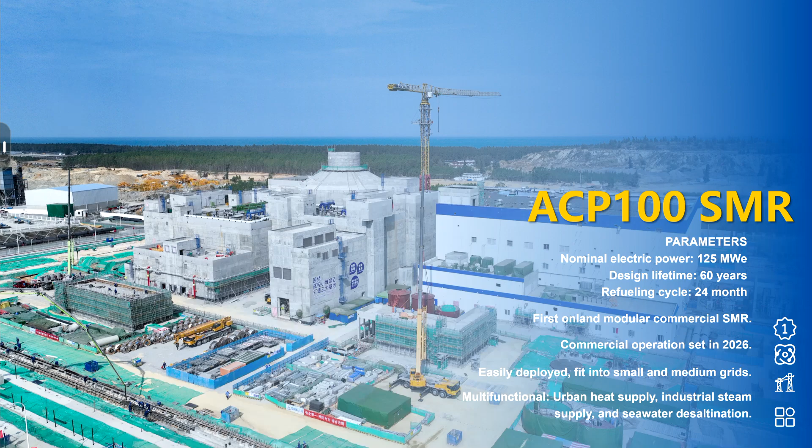And another CNNC small modular reactor is the ACP100. We began to build its demonstration project in 2021, and the plan is to get into operation next year. By the way, we just finished the cold functional test last month.

The ACP100 is one of the most advanced in terms of construction period progress. It is small, it has an integrated design, and it is flexible for small or medium-sized power grids. You can use it for electricity supply, steam supply, seawater desalination, and all kinds of multiple applications.

We all know that during the last decades, a lot of Generation 3 nuclear power plants have faced delays and budget overruns. I think the delay can reach up to an average of 8 years, and the budget can rise up to more than double. But all of CNNC's Generation 3 nuclear power plants have been finished ahead of schedule and within budget. The reason is efficient construction management.

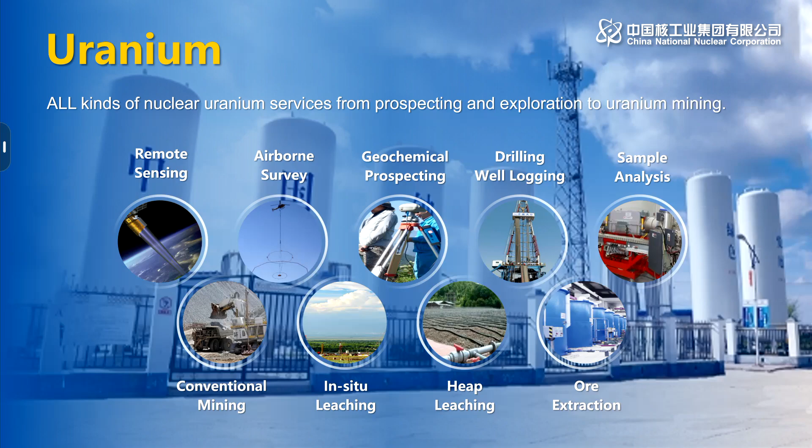And talking about fuel supply: CNNC is China's only full-cycle nuclear fuel supplier. From exploration to uranium mining, we have the professional teams and advanced technology to secure our fuel supply.

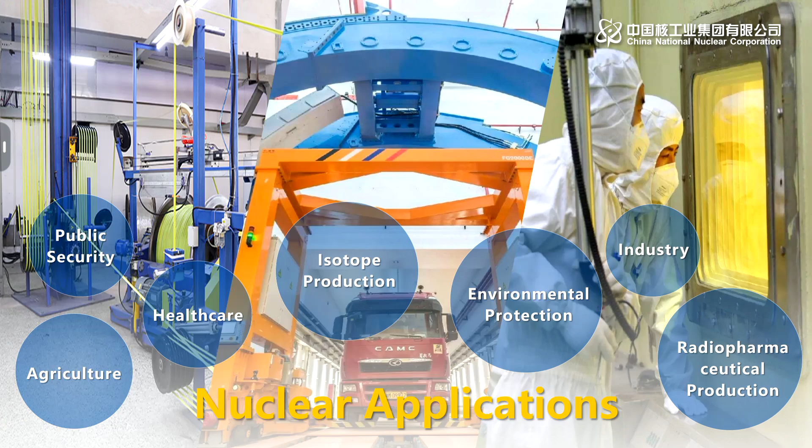CNNC is also one of the biggest nuclear application companies in China. We account for more than 80% of the research, development, and production capabilities in China, and we offer more than 17% of the nuclear medicine in the Chinese market.

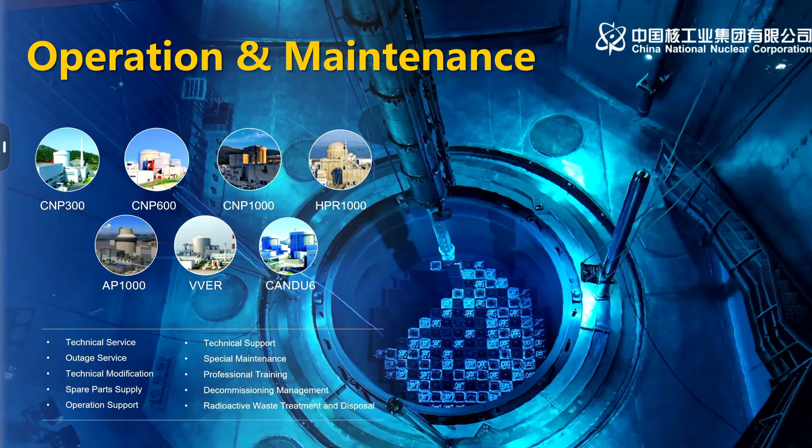When it comes to environmental protection, CNNC offers services in the radioactive waste management business. We can do radioactive waste reception, treatment, disposal, and also decontamination, dismantling, and decommissioning of nuclear facilities.

So to our global clients, CNNC offers specialized service across all nuclear sectors. That commitment also extends to talent development. We offer specialized training programs, professional education, and partnerships with top universities with scholarships. We welcome all collaboration around the world to advance nuclear together.

All right, ladies and gentlemen, that is a brief introduction about CNNC. The story continues as my colleague will dive deeper into our research and development capability, proven delivery, and diversified application. Okay, Mr. Li, you have the floor.

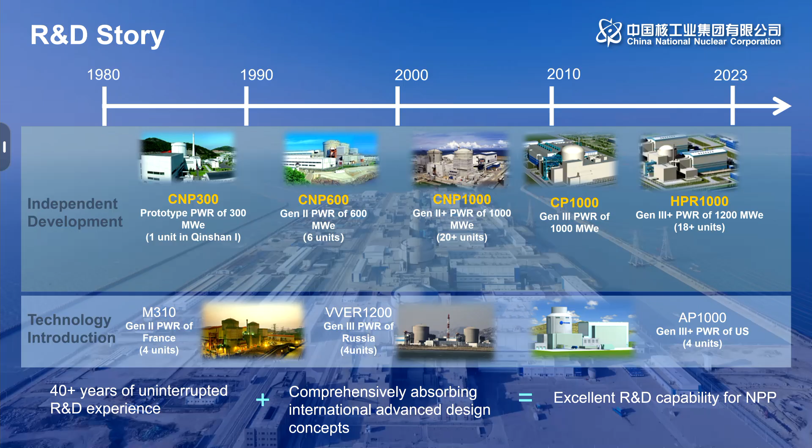CNNC has more than 40 years of uninterrupted R&D experience. From the very beginning, the Qinshan Phase 1, a 300 megawatt electricity nuclear power plant, was built in 1985, 40 years ago. Then we built our own 600 megawatt plant called CNP600. After performing self-reliant R&D, finally we have our own third generation large-scale nuclear power plant called HPR1000, also known as Hualong One, and also ACP100, the SMR.

The third one is called CIAE. This one is mainly focused on the sodium-cooled fast reactor design, and also the fuel for the fast reactors.

The fourth one is a very interesting one, we call it CMPO. This one is mainly for R&D and research on operation and maintenance, such as inspections, repair and maintenance technologies.

Not only do we utilize our own subsidiaries to perform R&D, but please notice that every year we have about 8 or 10 units put into construction, so we will utilize all of the industrial chain in terms of R&D and design.

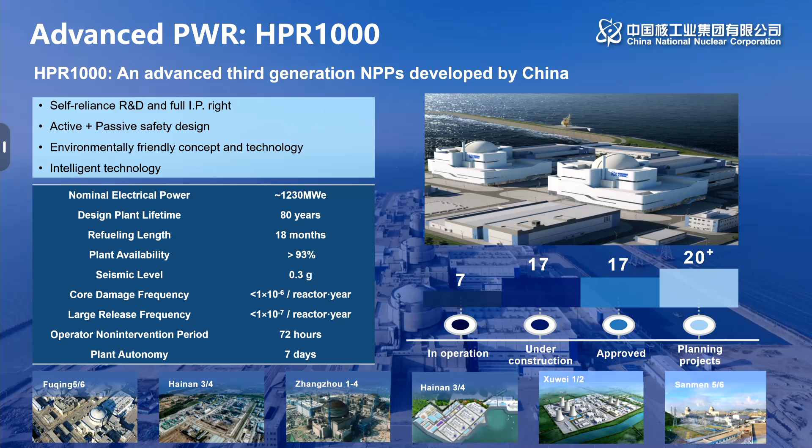Now we have 7 HPR1000 in operation, both in China and in Pakistan. There are another 17 under real construction, and another 17 have been approved by the State Council of China, meaning those approved units will be put into construction in the next 18 months, according to government requirements. Then another 20 more units are planned for construction in China and other countries.

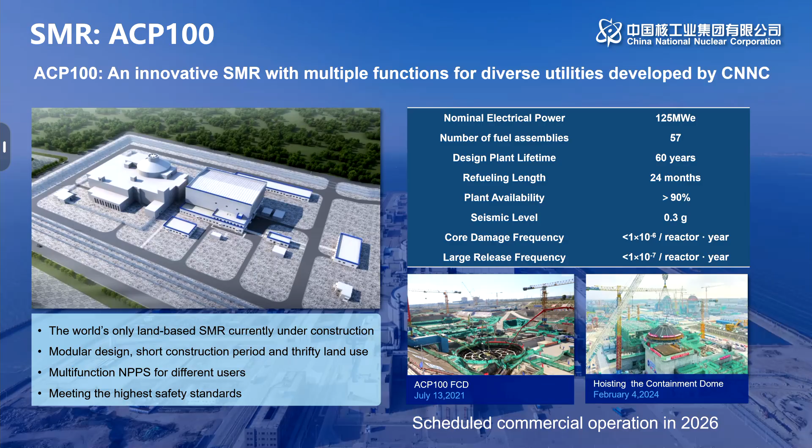The second one is the ACP 100, the SMR. The nominal electrical power will be 125 megawatt, the plant lifetime will be 60 years, and we have a long refueling cycle of 24 months. This ensures very high plant availability, larger than 90%. It can reach the safety target for third generation nuclear power plants, or we can say it reaches one order of magnitude better than the regulatory target defined by IAEA.

This is the progress of the project. The first one was constructed in 2021, and last month we finished the cold functional tests. We anticipate this first one will be put into operation in early 2026.

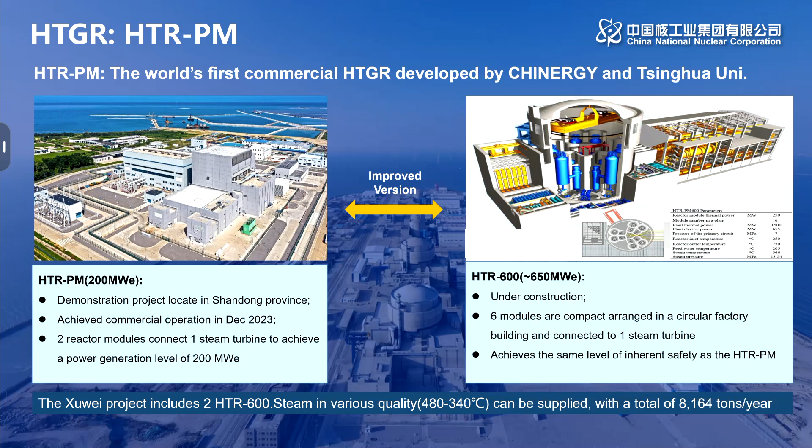So in CNNC, we have totally experienced human resources with more than 70 disciplines in 11 mature fields. The total number of engineers or specialists is more than 10,000. You can see we have a strong capability covering different disciplines from reactor design, equipment design, electrical communication, balance of plant, and conventional island design.

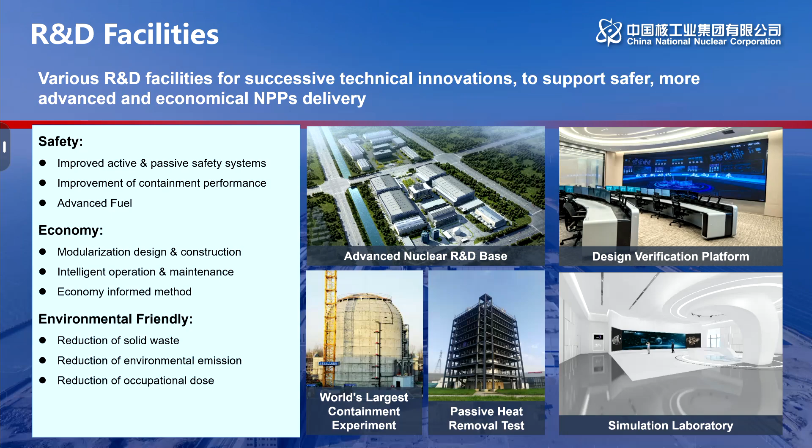We have also constructed several large R&D bases to proceed with the R&D program. This base is located in Langfang, in the southeast of Beijing, just 70 kilometers away. In Langfang we have several large platforms to verify phenomena of new reactor types, such as the world's largest containment experiment for structural bearing capacity after a severe accident.

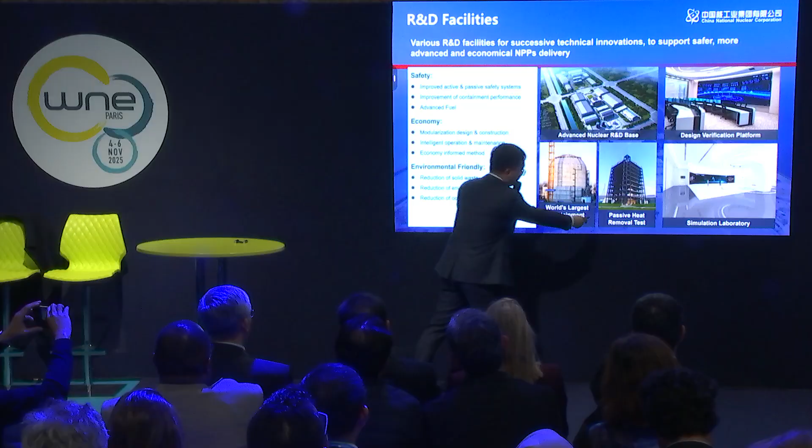And this one is also a structural containment test platform called the passive heat removal test. This one is the thermohydraulic heat removal system verification platform.

Now we can not only hand over a real physical plant, but in the next few years, we can hand over a totally digital plant. Our goal is to use digital technology in the design process and construction process, and finally hand over a digital plant to the owner for long-term operation and maintenance.

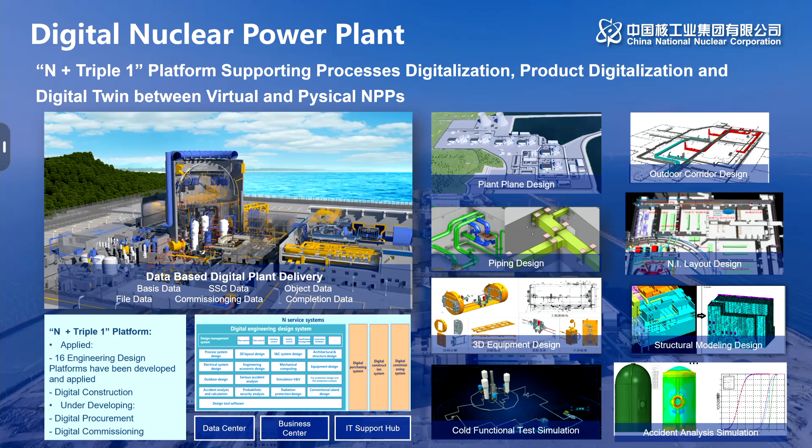In the design part, we have developed different discipline digital platforms, such as plant plan design, piping design, layout design, equipment design, and also safety analysis and accident analysis simulation platforms. In the near future, two-dimensional documentation and drawings will be reduced as much as possible, and three-dimensional delivery, not only to the construction team but also to the owner, can be fulfilled.

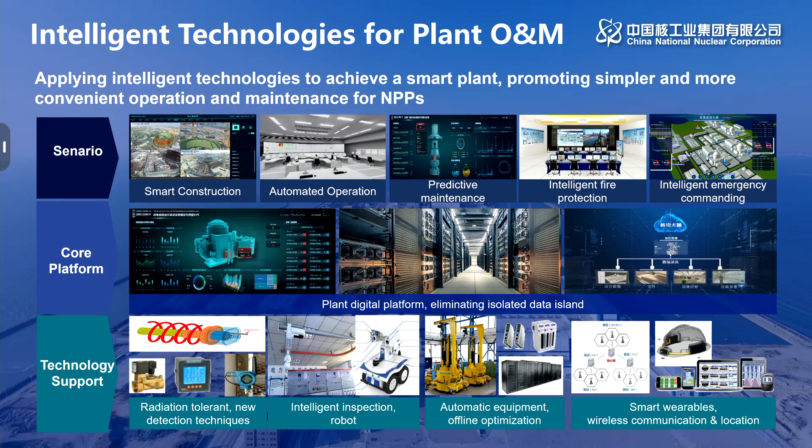AI is a very hot topic. Now we are using more and more AI technology, automation operation technology, radiation tolerant devices, automatic equipment, robots, wireless technologies, and smart wearables to make the plant more smart and more intelligent.

The total target is to achieve smart construction, automated operation, predictive maintenance of equipment such as rotating equipment and the cooling water pump of the plant, and intelligent emergency commanding under accident conditions. In the near future, the operator workload and field workload can be significantly reduced by applying these intelligent technologies.

As mentioned by Mr. Liu, this is a very interesting project called the Jiangsu Xuwei project. In this project, there are 4 HPR1000 PWRs combined with 2 HTR600 high temperature gas-cooled reactors.

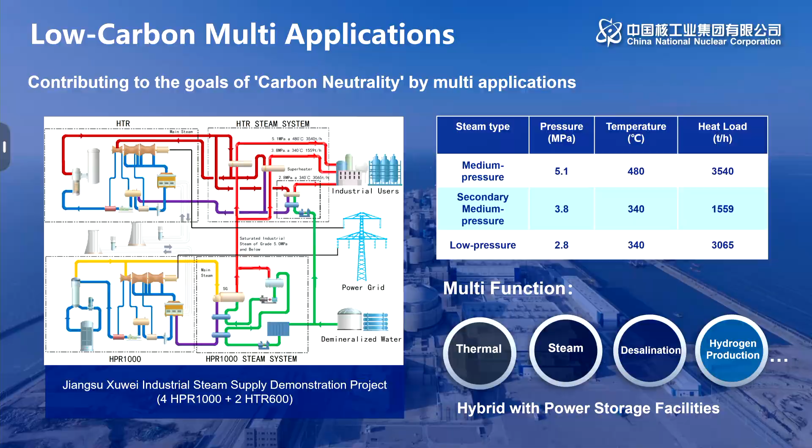The HPR1000 will heat up the cooling water to saturated steam, and then the HTR, using its high temperature features, can overheat the saturated steam into overheated steam. Then we can supply different levels of steam to customers nearby. There is a large petrochemical park near this project, so we can sell different pressure and temperature steam quality to customers. This really happens in the Jiangsu Xuwei project.

Because CNNC has a very integrated industrial chain covering design, construction, operation, maintenance, and commissioning, in the design phase we can fulfill the needs of construction teams and manufacturers. For example, we use more and more modular design in our design phase to achieve modular construction.

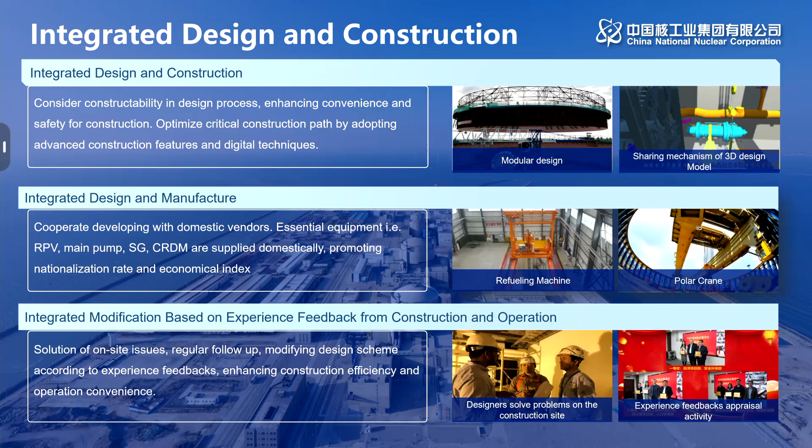In the design phase, we also try to reduce difficulties for equipment manufacturers, such as lowering the placement of some key equipment to lower the seismic spectrum. That means the seismic qualification of the equipment can be significantly reduced. That's why we call it combined design and construction, and combined design and manufacture.

Also, through massive construction of HPR1000, we optimize our design step by step based on experience feedback from previous project construction and operation.

That's my conclusion. We are willing to cooperate with all other countries interested in the fields of scientific research, technology innovation, and market development. That's my presentation, thank you very much.

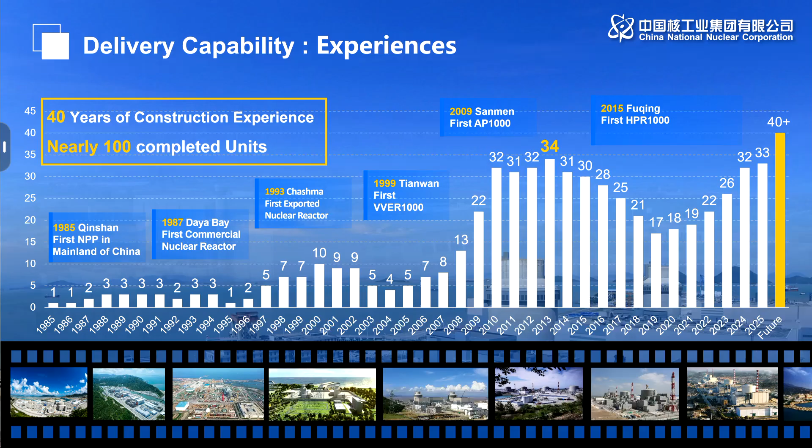And another number is 33. At this moment, in mainland China we have 33 units under construction simultaneously. I think it's ranking first in the world. And in 2025, we already have nearly 100 units under construction or in operation. So please remember these figures. Our capability can now support more than 40 units being constructed at the same time. So do you remember these figures?

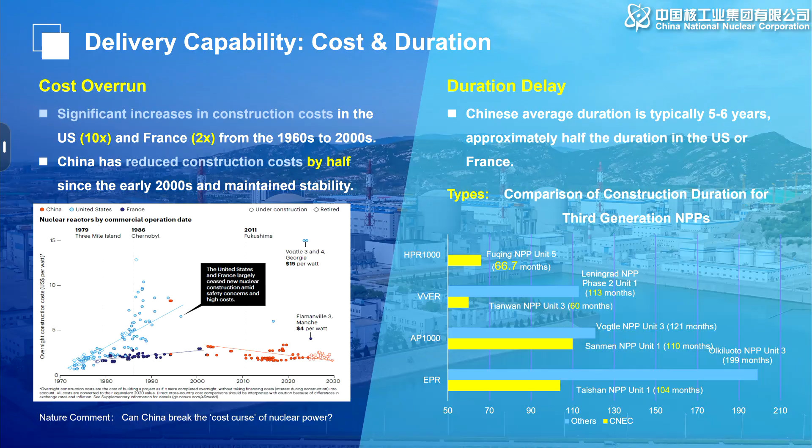Let's move to the next part, about duration and cost. This is about an article published this year in Nature showing the cost, that since the 1960s to the 21st century, the cost in the US increased almost 10 times. In France, about 2 times. But how about in China? It's half the cost and remains stable. We cost so little, and we also break the duration record continuously.

Right now you can see the very first units like the EPR, like the AP series — we are setting the record, the shortest duration under our capability. Every fellow knows that if we want to control the duration, every critical part is important. So we separate it into different critical parts, and you can see every step we are setting a world record. That's our guarantee. However, every step is based on nuclear safety.

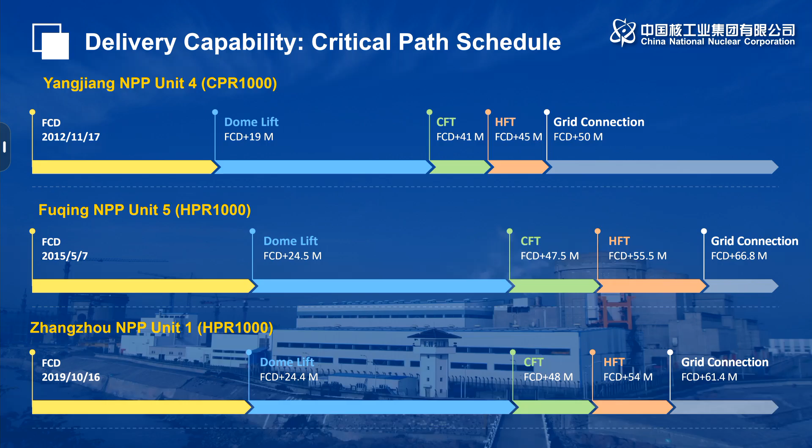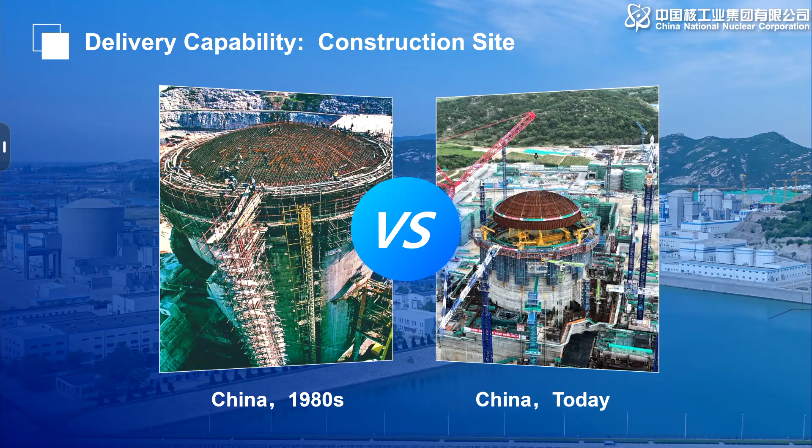This picture is very vivid — you can see the signs of what China was like in the 1980s and what's happening right now. You can see what happened with management and the technology route. It makes our jump a very big leap over 40 years.

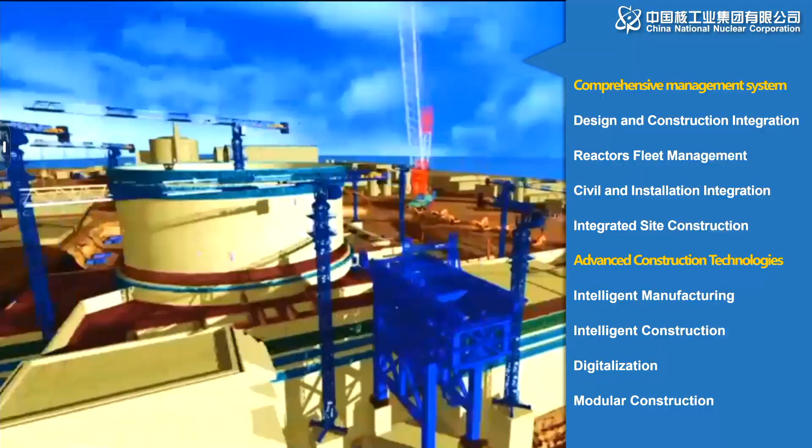So let's move to the next part. Why we have made such achievements is about our capability. You can see from this slide that comprehensive management and advanced construction technologies are both very important and both play a very important role in our delivery capability.

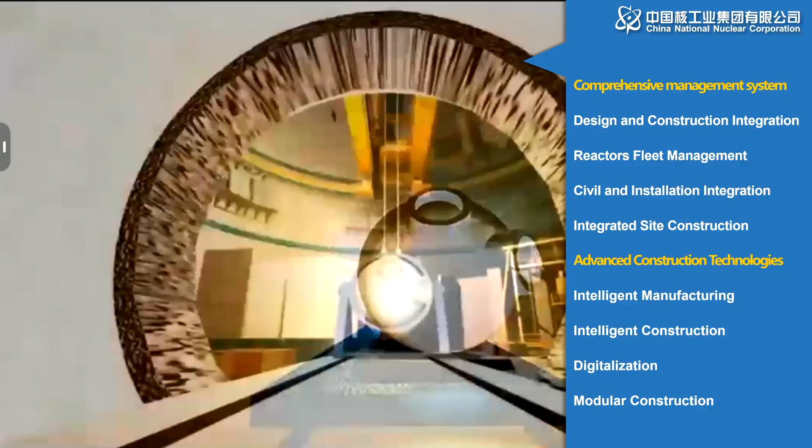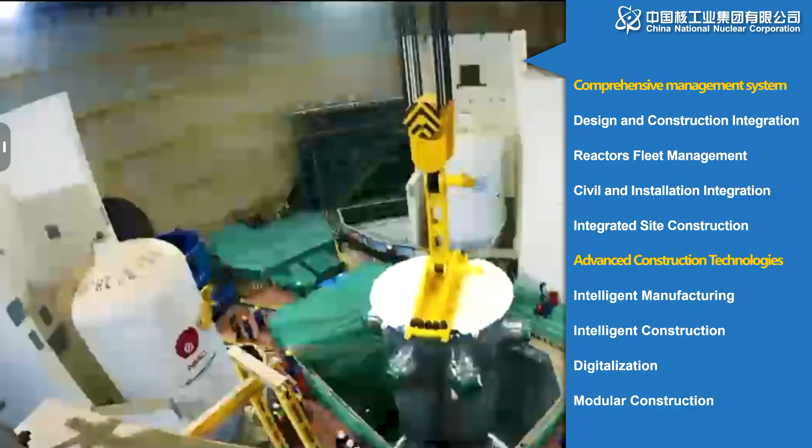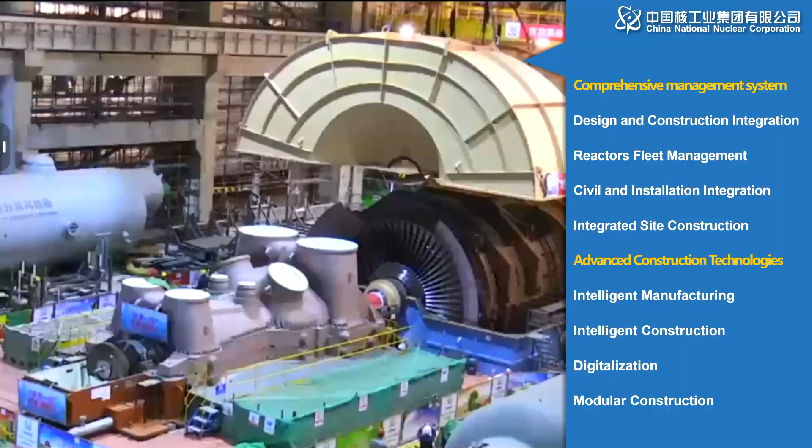So what did we implement for comprehensive management? Things like design and construction integration, reactor fleet management, civil and installation integration, and integrated site construction. But today I will focus on advanced technology, because everyone knows technology changes the world. It's the same — there's no exception in NPP construction. We use technology to change the sites.

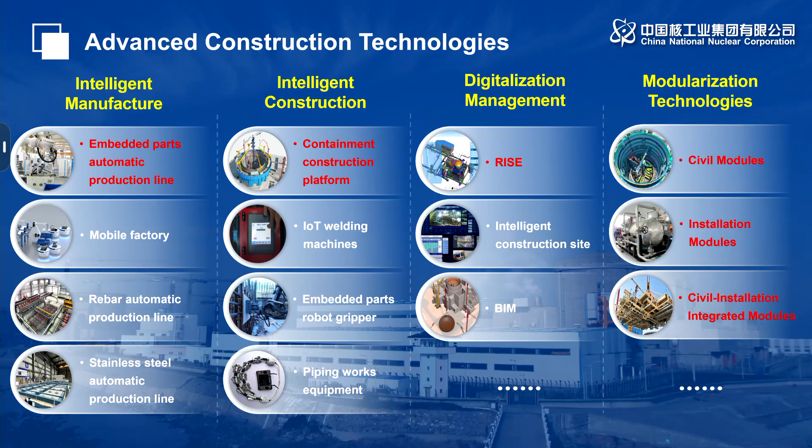Our keywords are well known by everyone: intelligent, digitalization, and modularization. Our capability is based on these keywords. I will give some examples based on these keywords.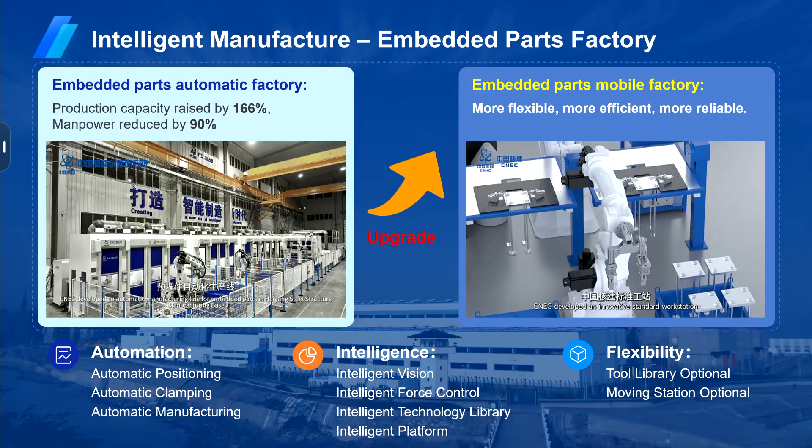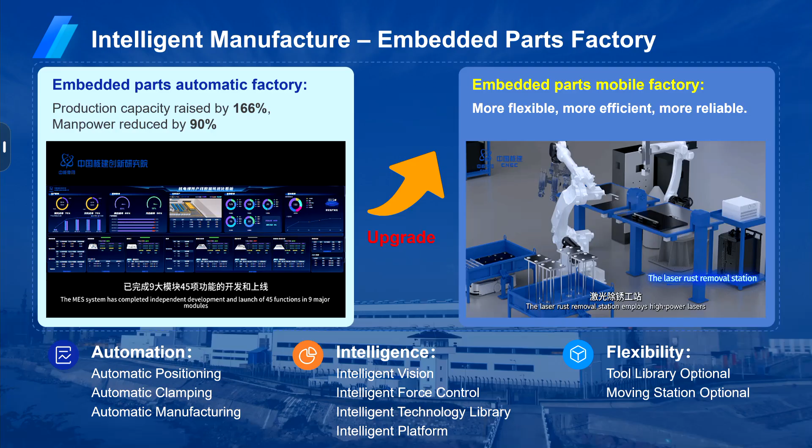First, about intelligent manufacturing. These slides show our embedded parts factory, which is already in operation in Shandong province. What happened when we made the production line totally automatic? It increased our production capability by 166%. At the same time, we reduced our human resources by 90%. This is why we can keep the cost very low while guaranteeing our safety.

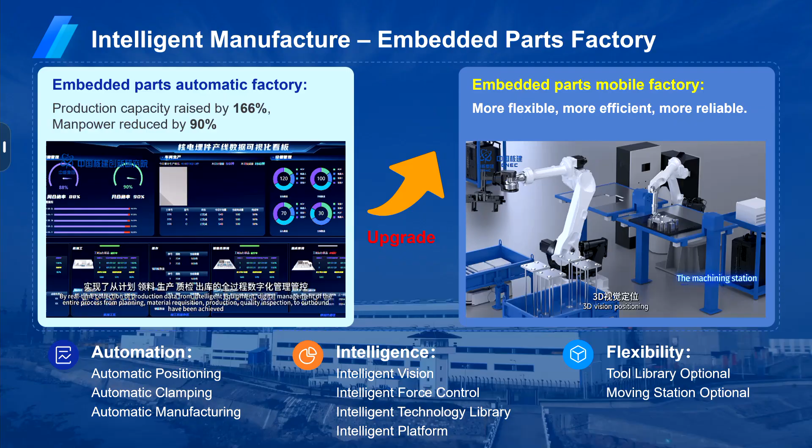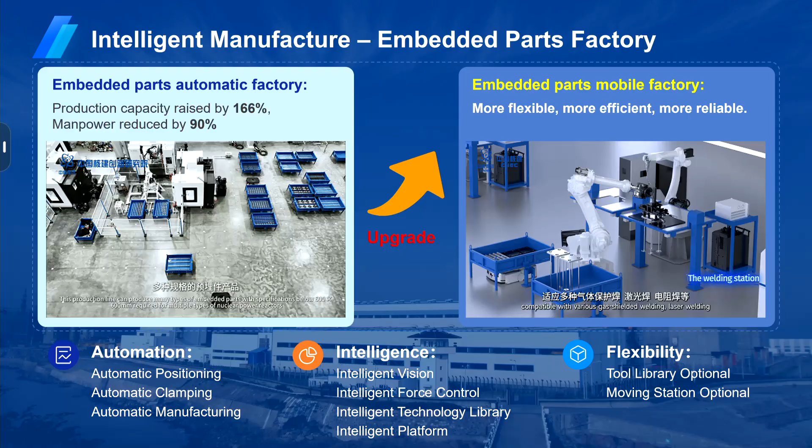At the same time, we are researching how to make the embedded parts production line more flexible, more efficient, and more reliable. So this is a mobile factory. Tomorrow, next year, you will see it.

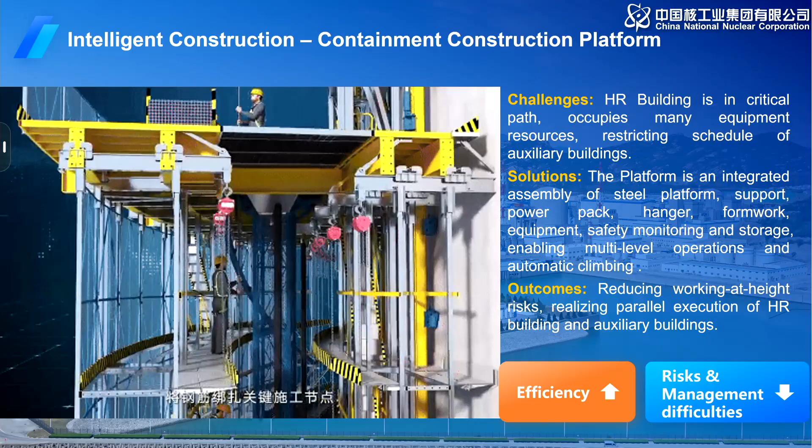This slide shows what we can call an intelligent construction method: a new containment construction platform. This is why we needed to make this platform — we faced the challenge that the HR building is a very critical part, but it occupied so many equipment resources. So we needed a solution to resolve this challenge.

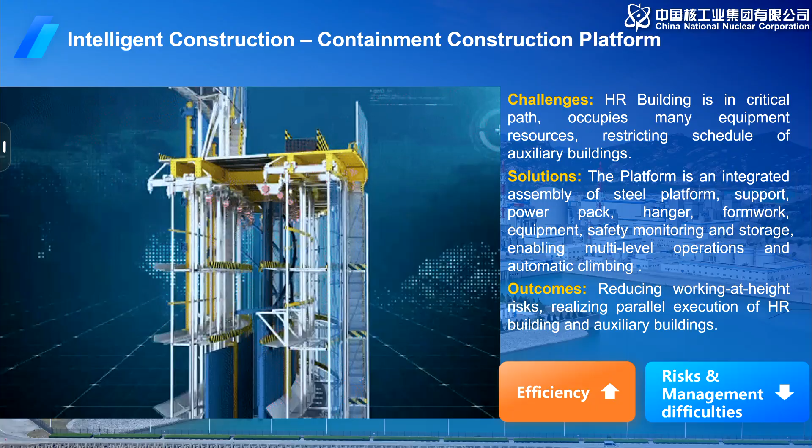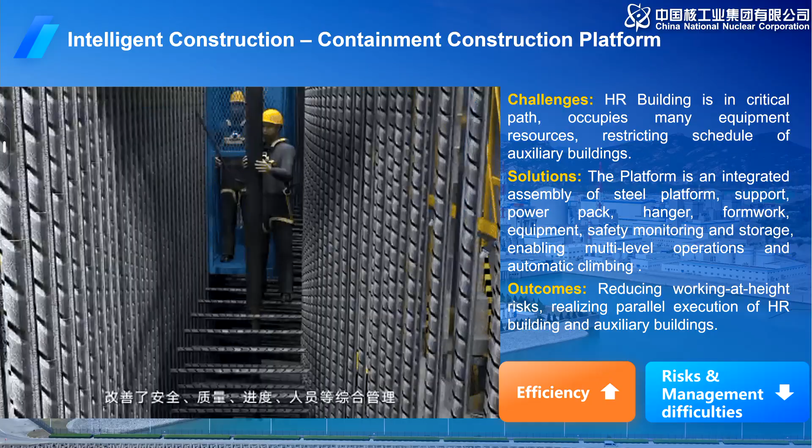So what did we do? The platform is an integrated assembly of the steel platform and support power packs, hanger, formwork, equipment, etc., into the same platform, enabling multiple level operations and automatic climbing. At the same time, this improved our efficiency and significantly reduced the risks and management difficulties.

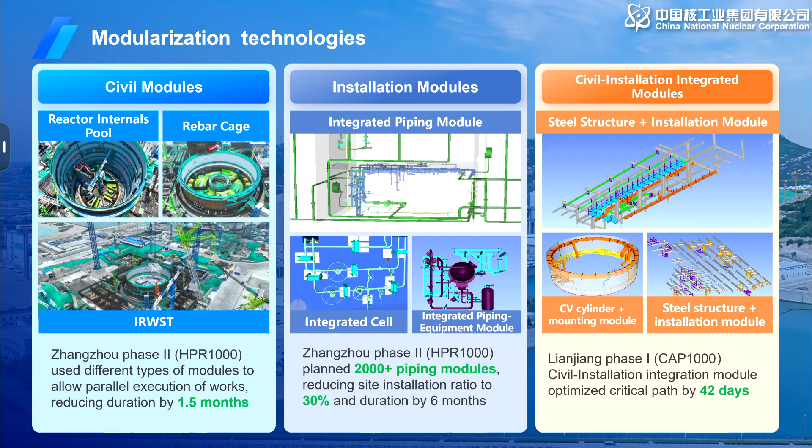This shows our modularization technologies. Right now, modularization is a very popular word in nuclear construction. This shows how modularization can contribute to our cost and duration. For civil modulars alone, we can save 1.5 months for one module. For installation, used in Zhangzhou Phase 2, which is HPR 1000, we planned 2,000 piping modules, and its duration was reduced by 6 months. We also combined civil and installation together, which saved our critical path by 42 days. So all of this makes our duration controllable.

Digitalization is a global trend right now, and the same is true in nuclear construction. This is our new generation system, called the Lean Construction Management Platform. In our system, we call it the RAS system. It's cloud-based, featuring a multiple project database for reactor type coverage, end-to-end process connection, and frontline management. It enables progress visualization, digital quality management, and visual work instruction. That is its function.

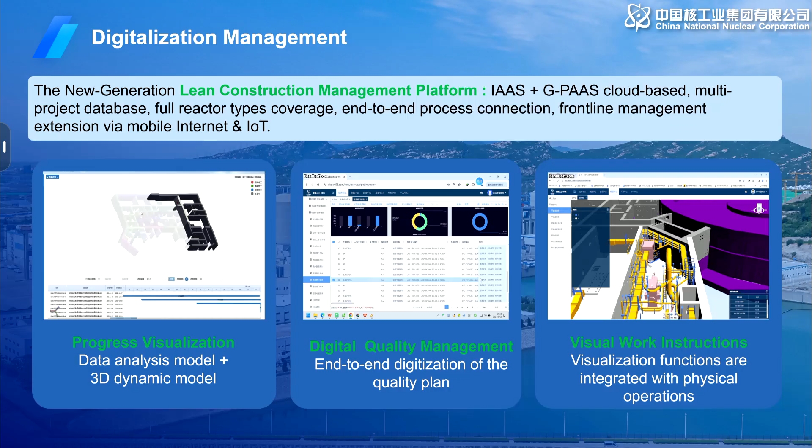Everyone knows we have almost 40 years in nuclear, and we started with our EDF fellows. At the Daya Bay project, our managers, workers, and engineers worked with the EDF fellows. Then we started. From Daya Bay to Lingao, and now we come to WNE. Right now we still work with EDF, but at this moment we assist EDF to make his 6 units planning into reality. I think this is a benchmark for international cooperation between China and France, and also a model for world cooperation in nuclear energy.

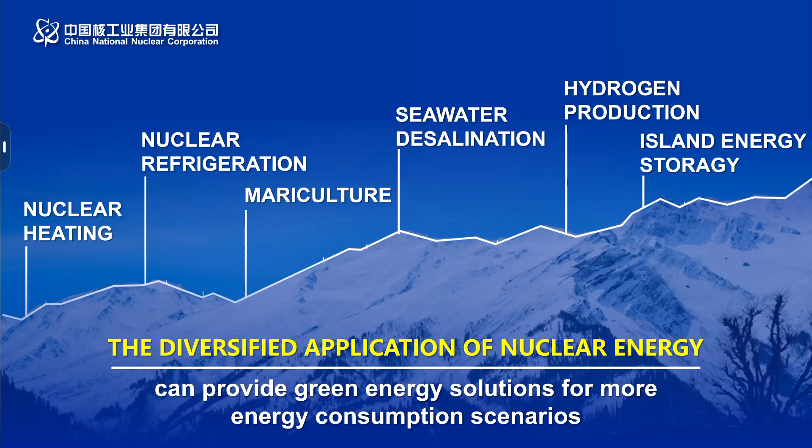The next topic I want to share is the diversified application of nuclear energy. Clean nuclear energy has lighted up thousands of homes. In order to meet people's increasingly diversified energy needs, CNNC has taken advantage of its innovation in nuclear energy, keep exploring new scenarios for diversified application, and we have achieved remarkable results such as nuclear heating, seawater desalination, hydrogen production, and island energy storage.

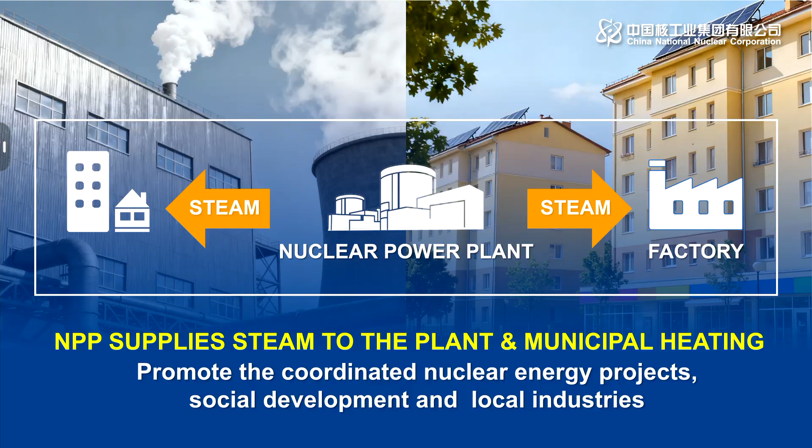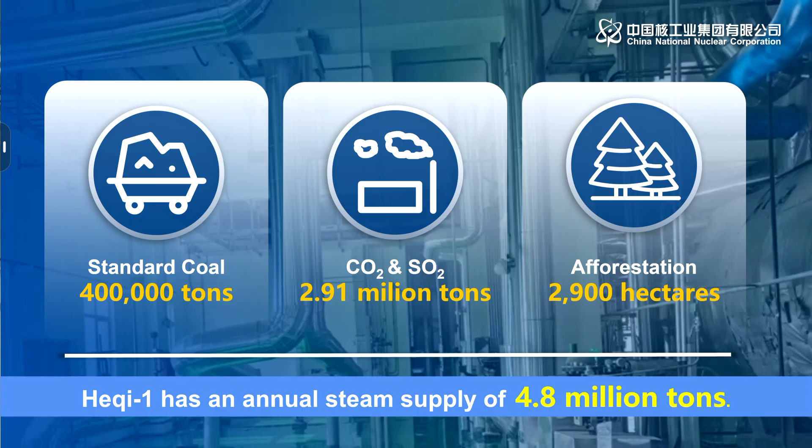At Tianwan Nuclear Power Plant, where I work, this project is called Heqi 1, and it has a steam supply of 4.8 million tons annually to the factory, which is equivalent to saving 400,000 tons of standard coal, reducing 2.91 million tons of carbon dioxide emissions, and achieving afforestation equivalent to 2,900 hectares.

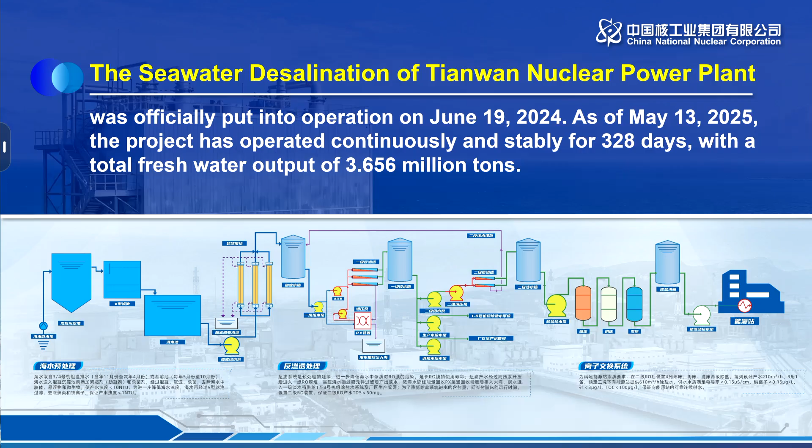We all know steam comes from water, but where does the water come from? In Tianwan nuclear power plant, a seawater desalination system was officially put into operation in 2024. As of May 13, 2025, this system has operated continuously and stably for more than 300 days, with a total freshwater output of 3.656 million tons. This project has helped us, including the petrochemical industry, reduce reliance on fossil fuels and achieve coordinated development of nuclear energy and freshwater resources.

The other direction of CNNC's diversified application of nuclear energy is to take advantage of advanced nuclear technologies, for example, SMR. In 2021, the Linglong 1 small modular reactor started construction in Hainan province. It is the world's first small modular reactor to pass the IAEA's safety review. Thanks to its features of short construction period, flexible deployment, and suitability for distributed energy systems, the Linglong 1 reactors are suitable for scenarios such as energy supply to small or medium-sized towns, islands, port facilities, and maritime development facilities.

CNNC has never stopped its efforts to explore diversified application of nuclear energy. Again in Tianwan nuclear power plant, the onshore project of the nuclear-thermal-PV-energy storage multi-energy complementary demonstration project started construction in 2022. This is a green and clean innovation and demonstration project, holding great milestone significance in promoting and exploring the nuclear energy plus new energy development model.

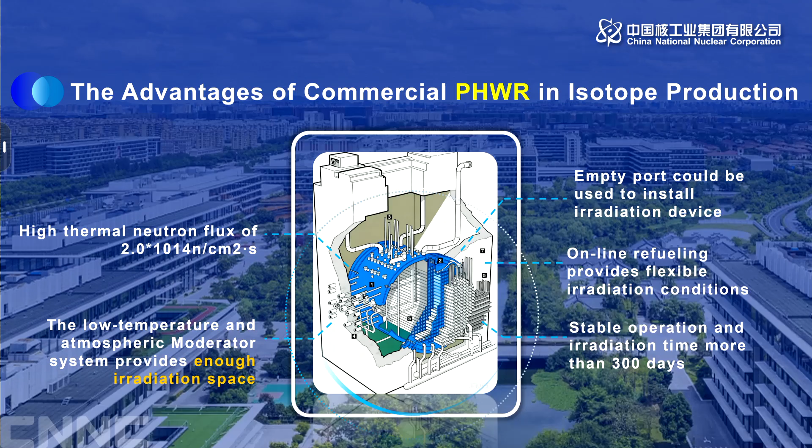That is not the end. In Qingshan nuclear power plant, CNNC is producing radioisotopes through heavy water reactors. We all know heavy water reactors have ample internal space, with moderator and coolant separated from each other, and high-level neutron flux. These features give Qingshan nuclear power plant special advantages in producing radioisotopes.

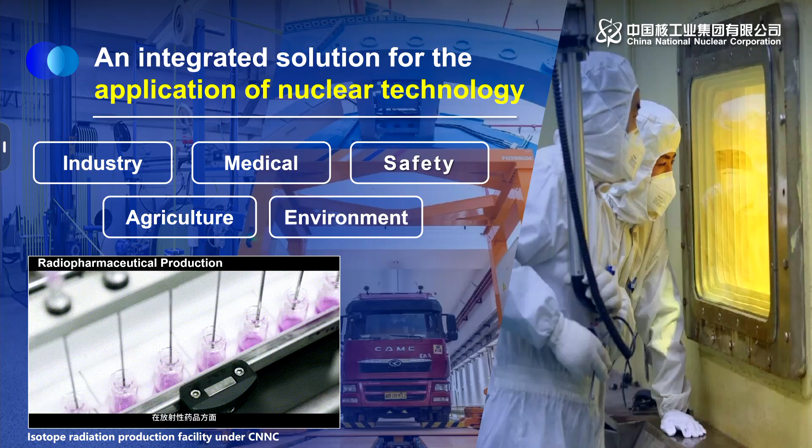Based on Qinshan nuclear power plant, CNNC will keep producing radioisotopes and exploring diversified application in the areas of industry, medical, safety, agriculture, and environment, contributing value to our diversified life.

So that's all for our energy solution, our dream, our delivery, and our diversified application. That's all for my part. Thank you.

Thank you. All four presentations have finished. If anyone has any questions, okay please, only one question given the limited time. I'd just like to ask quickly, in CNNC's experience, is there a trade-off between localization and speed and cost? So when you localize, does it become more expensive and slower?

Mr. Fan Li, please, about localization and cost. Thank you, gentlemen, it's a good question. We now have several potential customers overseas, in Asia and also in the Middle East and other countries. Localization is a key factor that all customers are concerned about. So we will, as much as possible, enlarge the localization rate of our overseas projects, such as from 25% or 30%, according to the capabilities of local suppliers, local design institutes, and local raw material suppliers, depending on different situations. The real price is confidential, so I cannot give you an exact number, but I can tell you that HPR1000 and ACP100 are very competitive compared with other same-type PWR technologies. We also have the full industrial chain and the full capability to supply main equipment, and with a large localization rate, we can assure customers will be satisfied with our price. Thank you very much.